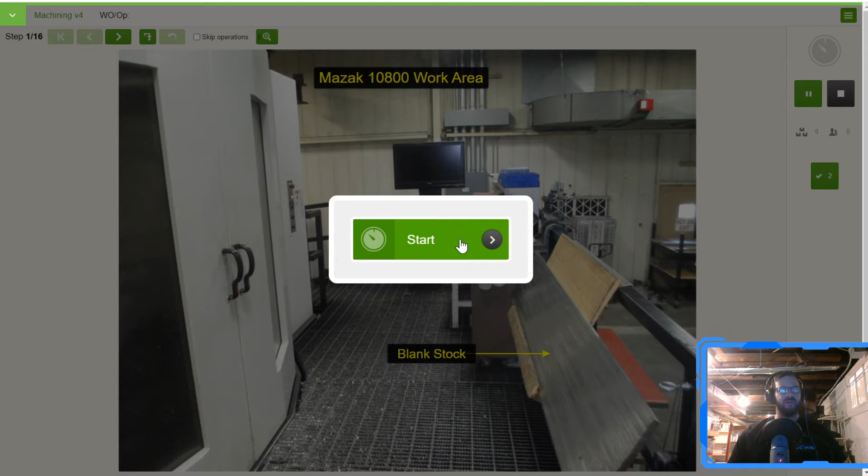So we do have some data collection: work order number tracking, quantity tracking, run times, and of course you can scan this stuff in from a barcode. I am going to just type some stuff in here. Looks like a proper work order number, right?

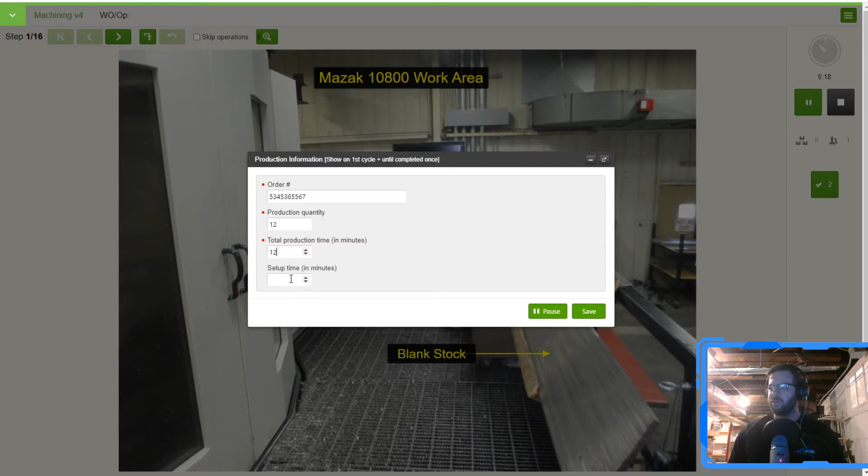I don't have many jokes this time around. Usually I talk about my shirt or my pants or something. I'll have more jokes for you next time. I'm still in my basement, right? Still got the basement behind me. I haven't put up any kind of curtain or anything yet. That'll be a fun little surprise when I do that.

So we're showing our machine. We are showing the blank stock of the material that we're using, and just the machine in general. Could show more, right? Could show tools, could show other things if we need to. In our example, we've got all our stuff hanging out on the toolbox there.

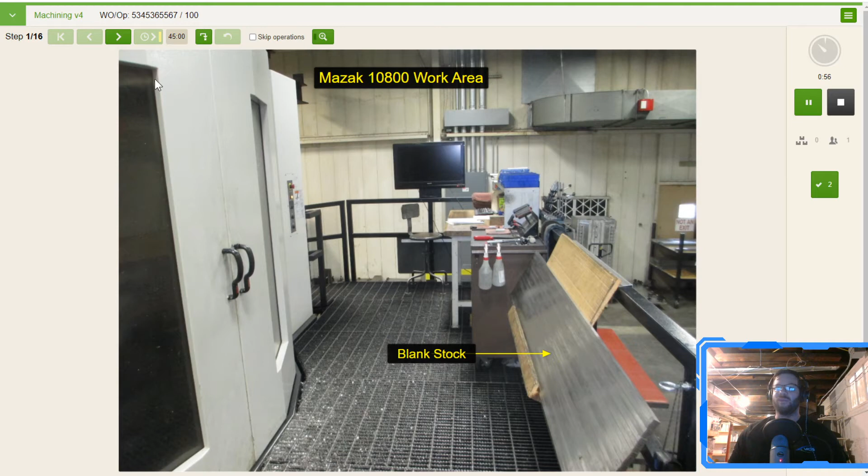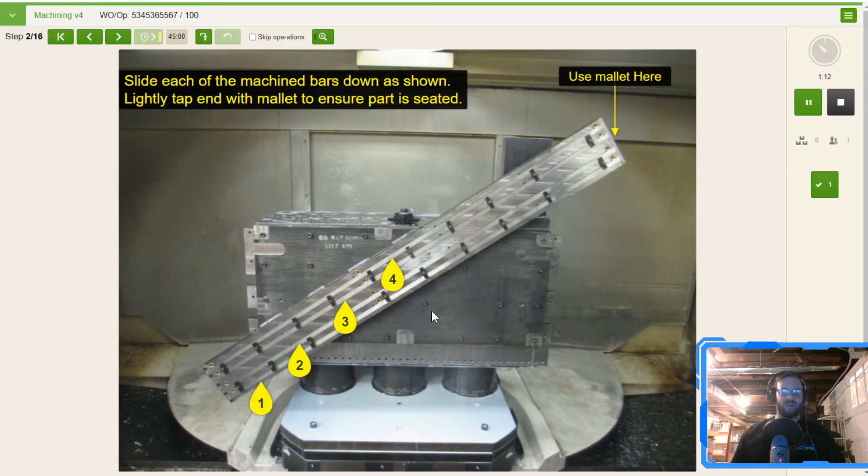So we're going to show our process. We've got our tombstone already installed. You could have an instruction or process for actually installing the tombstones if you need to. In this case, we already have it installed, so what we're going to do is just load in our bar stock. We are going to locate it on the bottom of the fixture like you're seeing here. This is really important.

If you are ever dealing with machining, you know that the product has to be in the same exact location every single time to get a good product. You're going to have your stops, your locators, fixed stops, adjustable stops, a whole bunch of stuff you can mess with depending on what you're doing. So locating and knowing exactly what you locate against is very, very important.

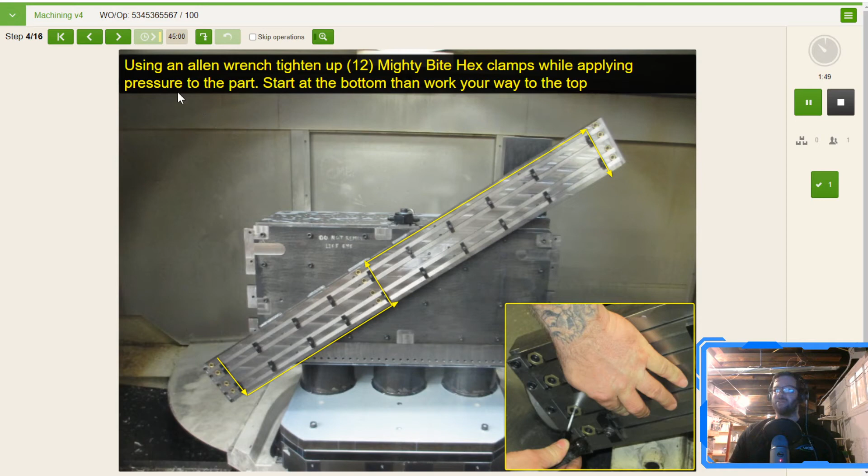Now we're showing a process of how to tighten up the product here. Using an Allen wrench, tighten up the Mighty Bite hex clamps and apply pressure to the part. We're showing you with arrows here what we want you to do.

After that, we're going to rotate the clamps and tighten them up in a sequence here. So we're actually showing some sequencing, order of operations, order of what you're supposed to be doing: step 1, step 2, step 3, and so forth.

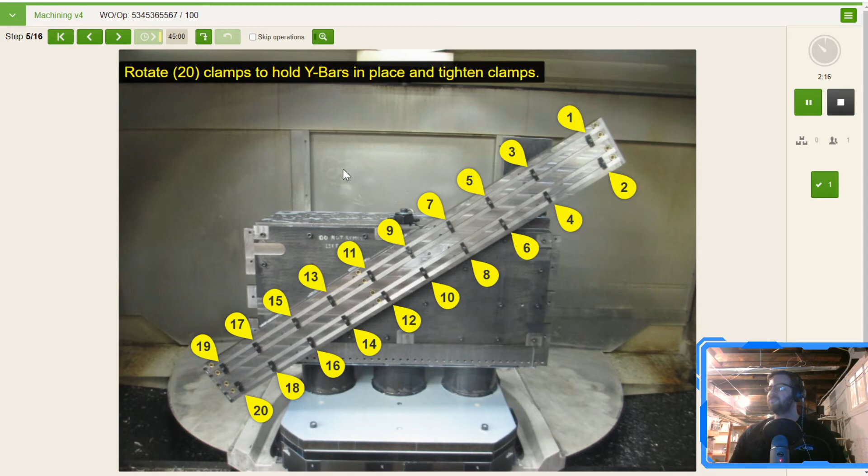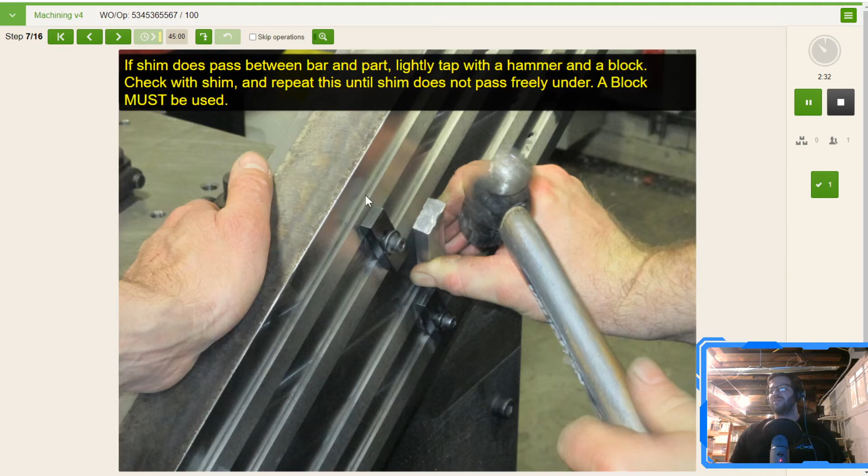Inspection type stuff, you can do that too, right? So I have a Shim Check in here, just to basically double check and make sure everything looks good. The shim should not be able to go between the bottom of the bar and the fixture as shown. If it does, we're telling you, hey, give it a little tap, make sure it doesn't go in, make sure it's seated correctly and properly.

So we're going to make sure that the parts are seated, we're going to make sure that all the clamps are tightened, and we're going to make sure that we have all our tools and our equipment out of the area. I've actually seen people just leave tools and hammers and wrenches just sitting on the tombstone, and then the machine runs and does its job. So we want to be careful of that.

Because we want to be careful of that, we have some checklist items in here. So we just have a checklist to make sure that we've removed all the tools and that the clamps have been tightened or torqued if necessary. So you could apply torques to these items and explain that in the process.

This is part of the traceability, of course. So as I'm checking this box and hitting save, a record is being saved. And then we have that, and you know that Spero said that he tightened all the clamps and said that he pulled all the tools out of there.

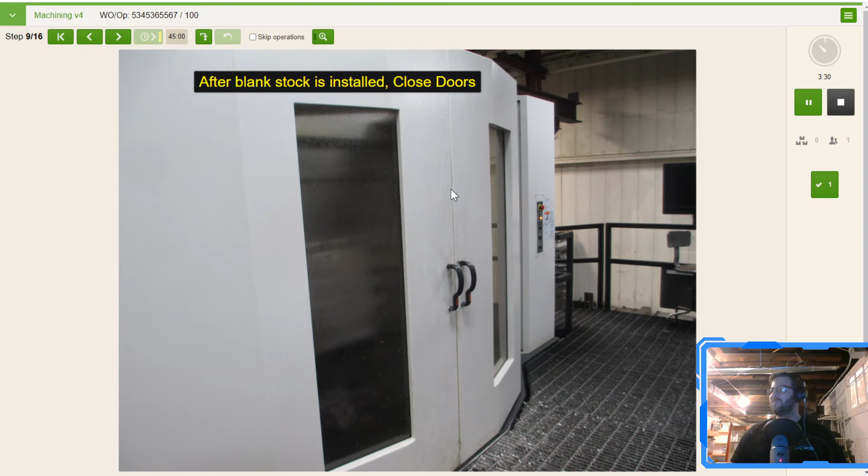We're going to rotate the tombstone if need be. This could change per product, per machine, per anything, but this is just our process here. And then what we're going to do is we're going to verify some items before we run the program.

So now we're getting ready to run the program. We're going to verify our tooling, and we're going to check what pallet's being used here. Now, I could have attached a tool sheet here or something. I didn't do that. We just have tooling and some items that are on the controller itself, so we're just verifying that. You could always do more here.

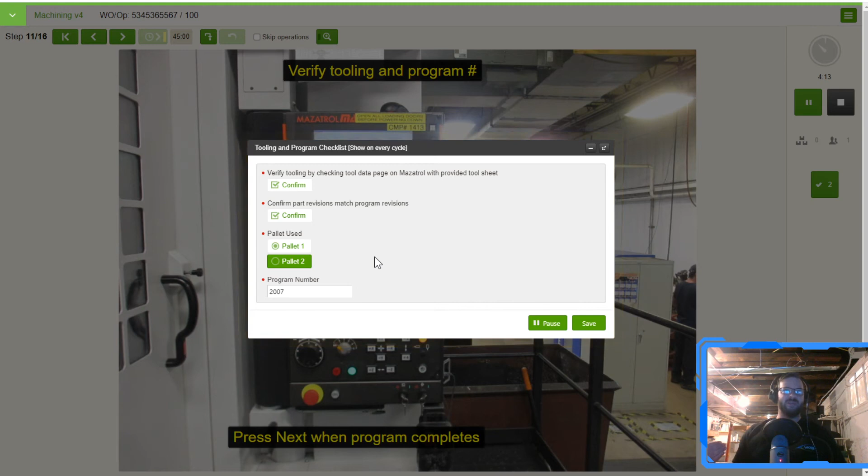Select what pallet's being used. Maybe you just have one pallet, maybe you have multiple. You could select what pallet's being used. And this is just something we did for data collection because we actually noticed on a couple of the jobs that pallet 2 was returning different results than pallet 1. And how we identified that was through something just like this.

And then we're verifying program number. So we're telling you what program number to use.

Okay, so now you're going to see at the bottom here it says press next when program complete. So right now in this case we are letting this run. The machine's doing the job, now we can do something else. What are we going to do?

We are going to either go and run another machine, we are going to work on another pallet of product. Maybe we're going to go down and deburr some items or clean up some product that's already been machined, and that's another big part of things as well.

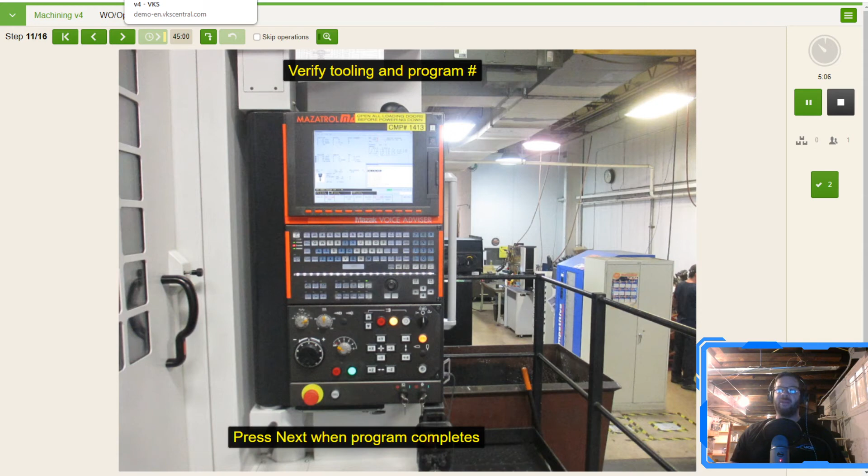So let's say we take on that scenario where I'm actually going to clean up some of the product that has already been machined in this case, right? So I'm going to go down, I'm going to open up my work instruction for the deburring process, and then we're going to go through that.

And I think this is a very cool application of VKS. I'll show you a couple of things in here.

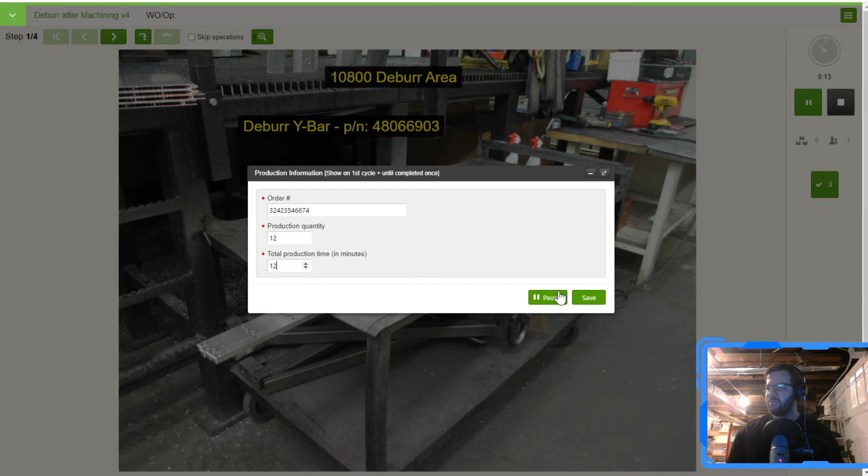We do have some data collection in this one. There isn't a lot. I probably don't even need to have this in here, but I've got the order number, production quantity, all that stuff that we're doing in here. Production time, I don't know, 12 minutes.

Sounds good, right? Again, pull that stuff from an ERP, scan it in from a barcode, whatever you want to do, you can. So we've got our product, we're showing how it looks. We have some checklist items in here. So we just have some basic sanity checklist items, make sure things look okay, the parts aren't all messed up and bent out of shape when we get them.

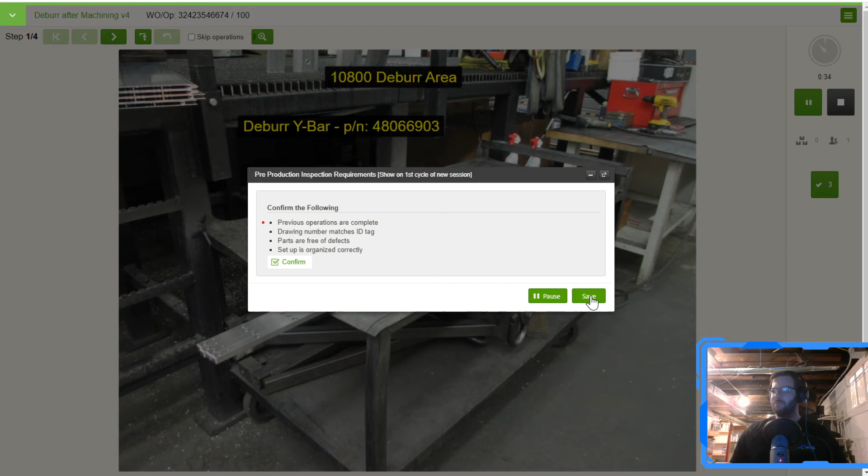Now this is what I like about VKS. You can have a couple of different ways of showing something. We're talking about our process here, right? So we have our picture and we're saying grind ends of the Y bar 3 sides to an angle of 45 degrees using a 90-degree die grinder with a 100 grit disc. So I'm telling you the paper to use or the grit of the disc to use. I'm telling you the die grinder to use. I'm telling you the tool.

I'm telling you how to do it, and I'm showing you a picture of it. In addition to that, I always love to add videos to things like this. You can really clearly show a process using videos.

Maybe this is something I do every day and I don't need the video, or maybe it's something I haven't done in 6 months and I just want to see a video to make sure, right? So you can always add videos to processes.

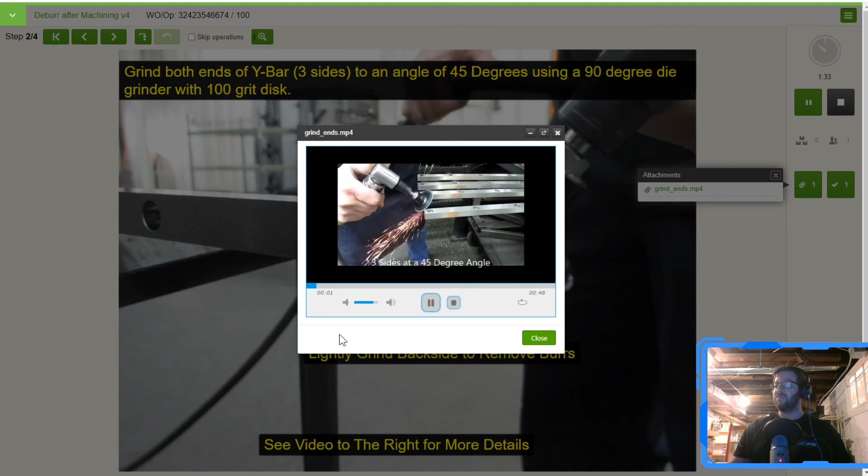In this case, I've attached a video on the side here using our attachment feature. I can select that video and see the process of how to deburr and grind the angles in. So this is here for you if you need it.

It opens up in a separate window like you're seeing, over that way. You see the video in there and all that. So we're showing that process, right?

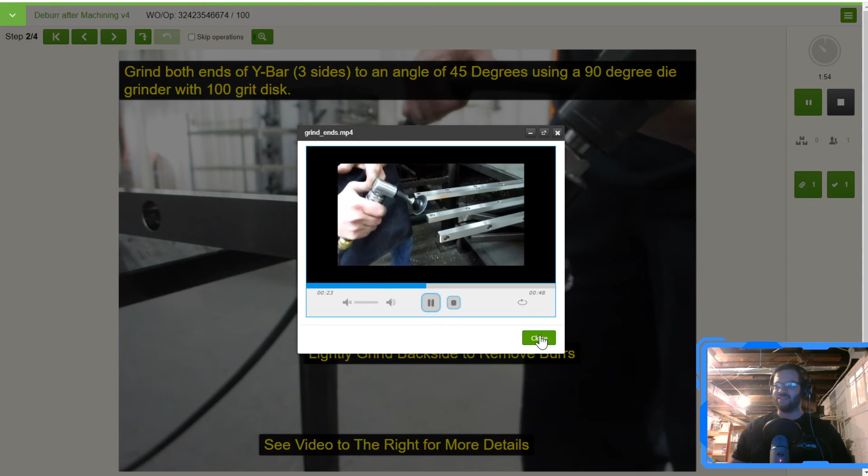I love using videos for deburring of machining products, for paint processes, and any little details, nooks and crannies that you need to see. It's always a good supplemental item to have on the side of the instruction, and if the operator needs it, it's there. Information right at the operator's fingertips.

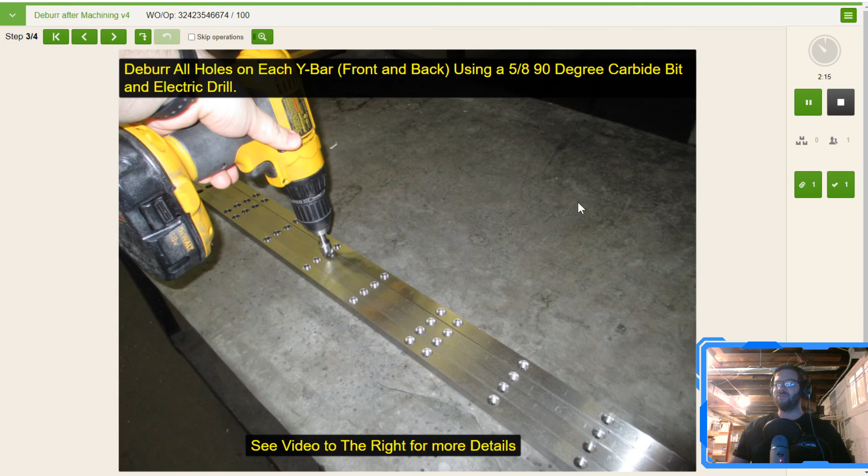I really didn't have to, but I added one here as well, just for a standardized process of how you're supposed to deburr these holes. Maybe somebody wants to hop all around and they don't know exactly what they're doing. This at least shows them, hit them all in a row.

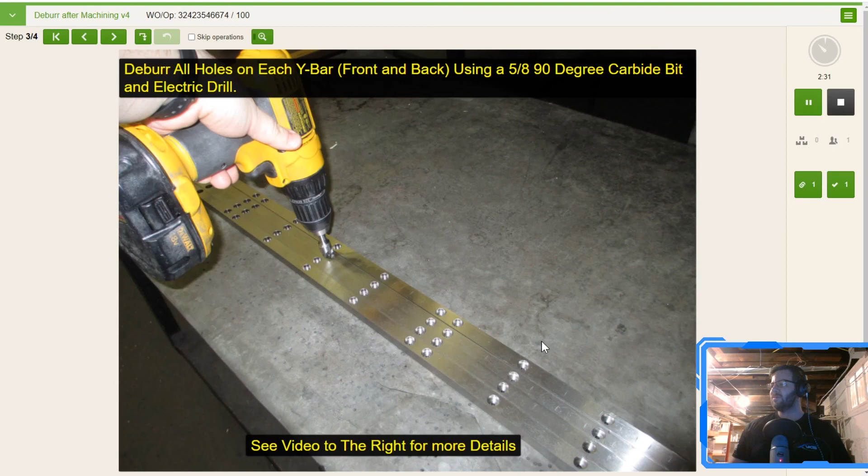And this one's a simple process. We're throwing our completed stock onto a rack. At this point, maybe our machine's done, so let's go back up and pull the items out of our machine.

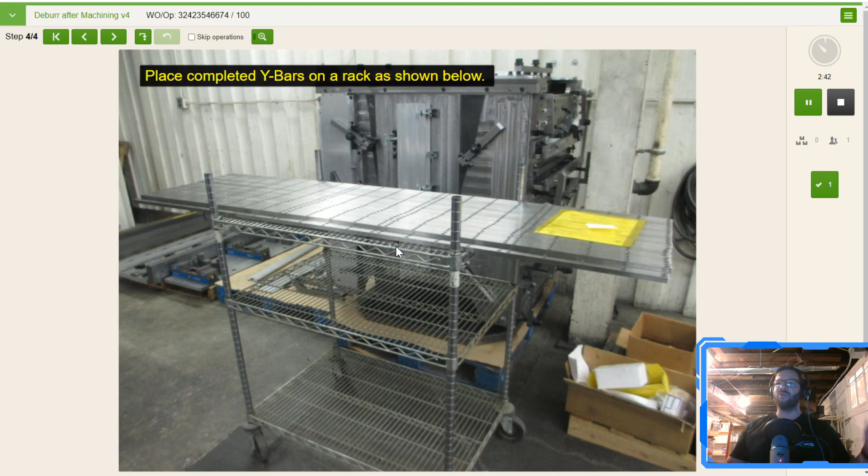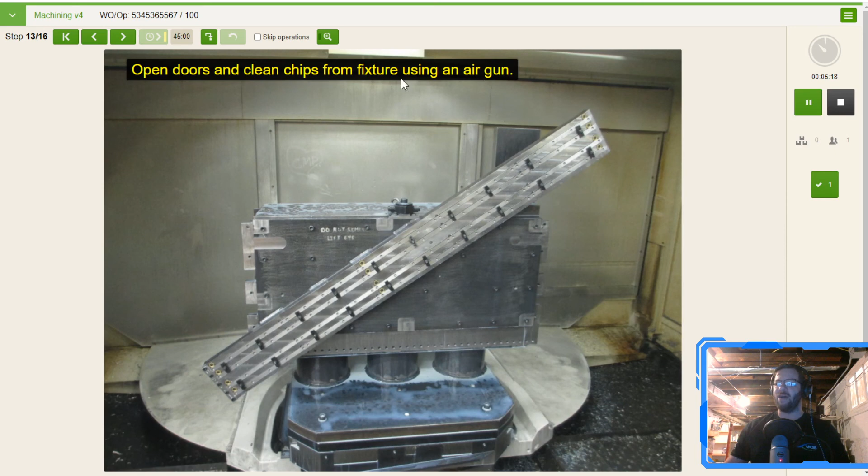So we go back up, we hit next on our machining instruction, going through our process. We're opening up the doors and here's our stock. We're going to clean it off, spray it off with an air gun.

And then we're going to tell you how to remove the product. We're going to say loosen up those hex clamps, the mighty bites, and then loosen up the other clamps, rotate, and then we're going to pull the stock out.

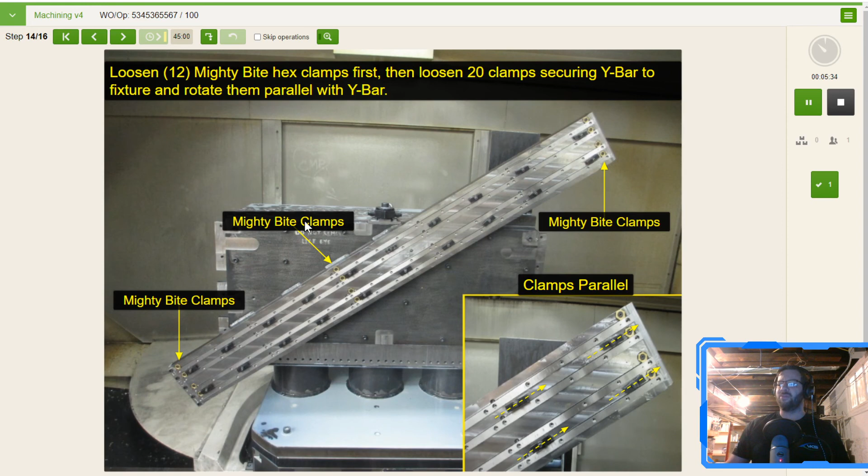Place the stock down so we can clean it and deburr it. And then we're going to clean off our fixture, and then we're going to get to the point where we are restocking. So we're just going through our cycles.

Okay, now I'm restocking with 4 more units, and now maybe I go back down and I deburr those products that I just pulled out.

So this, I think, is a really good application for machining. And like I said, you can have multiple operations here. If you're doing multi-sided operations on a tombstone, you can do the exact same thing here. This was just a simple one to show you, so I didn't have a 20-minute video here or something like that.

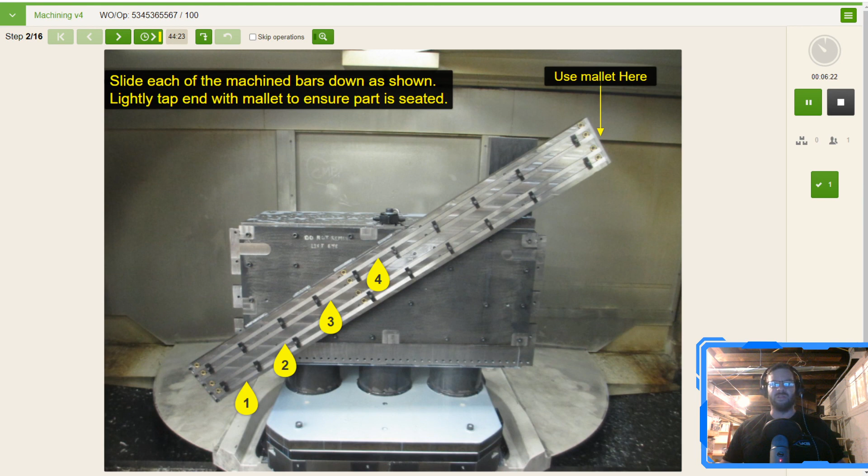But this is the machining and the deburring process that you can follow through and use basically anywhere. Anywhere you're doing machining, any size machine, you could do anything with this.